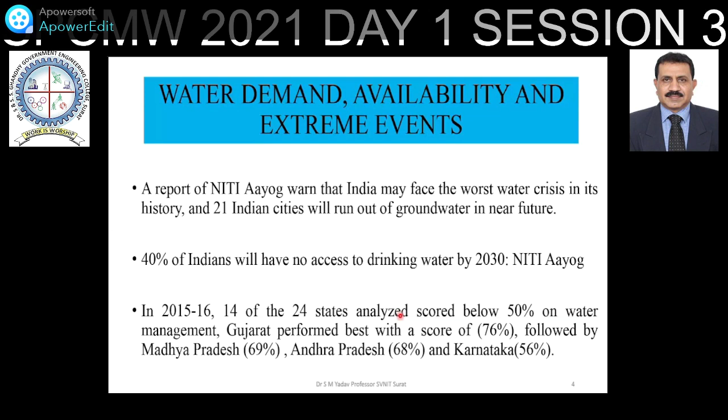Why has he mentioned clean water, cleanliness, and more steps towards cleanliness on 2nd October? This is one of the reasons, because as I said, 40% of Indians will have no access to drinking water. If we do not take proper measures, then many may be drinking contaminated water. In 2015-16, 14 of the 24 states analyzed scored below 50% on water management. Gujarat performed best with a score of 76%, followed by Madhya Pradesh, Andhra Pradesh, and Karnataka. So not only water conservation, but water management will be playing an important role in the management of water resources.

Water demand cannot exceed water availability. While water demand is increasing, water availability is decreasing. What is the scenario at the national level? At the national level, we observe that the water demand is increasing while the water availability is shrinking. What does it mean that water availability is shrinking? Here it is written water availability is shrinking.

Just after one or two slides, I will show you what is the picture of Indian available water. In 2010s, groundwater use globally amounted to 800 cubic kilometers per year. India, the United States, China, Iran, and Pakistan accounted for 67% of the global extractions. More than 30% of the world's largest groundwater systems are now in distress. This is the point of worry. You will observe that more than 30% of the world's large groundwater systems are in distress.

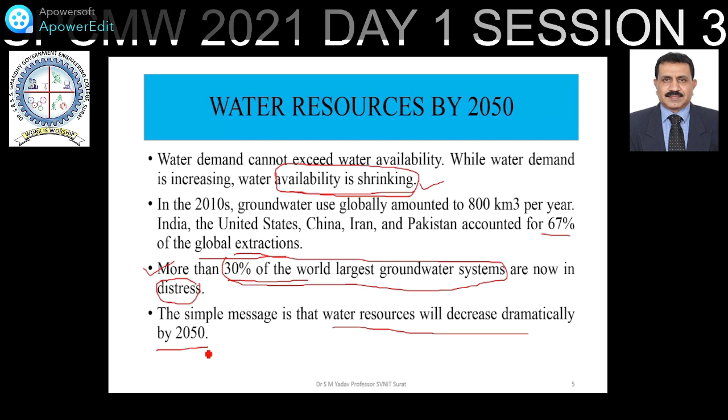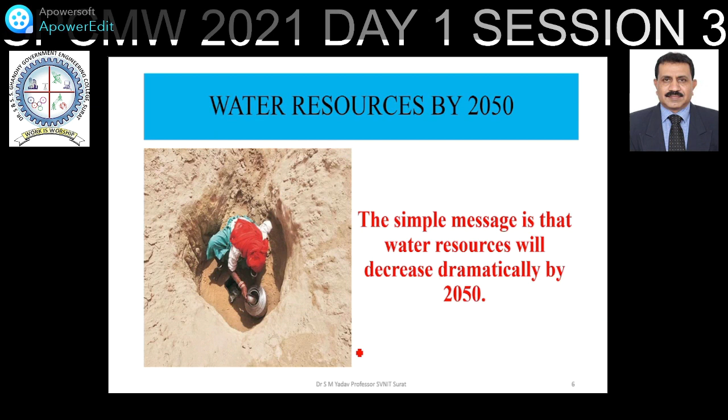On one side we talk about the amount of water; on the other side, the quality of water is also equally a point of worry. At present, 12% of the world population drinks water from unimproved and unsafe sources. More than 30% of global biodiversity has been lost because of degradation of freshwater ecosystems due to the pollution of water resources and aquatic systems. River regeneration, one of the major projects taken up by the Ministry of Jal Shakti, is also a step in this direction, because quantity and quality both are important.

And as far as the quality of water is concerned, according to the reports, many Indian river waters are no longer potable; the quality has gone from poor to poorer. However, I have seen in the last 5 years, if you see YouTube videos, you will come across a number of rivers and a number of NGOs that have come forward for the regeneration of rivers.

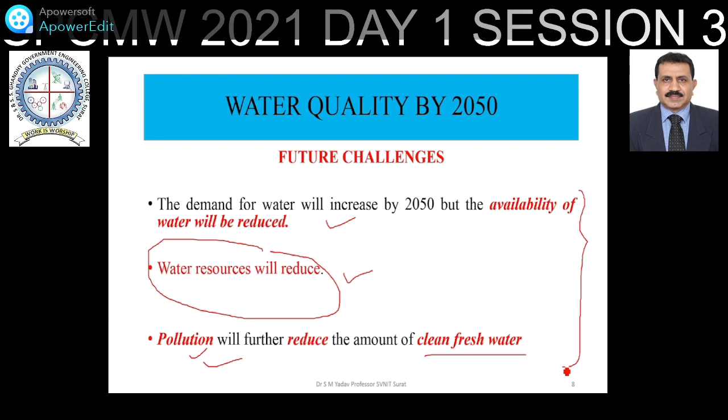So what are the future challenges? The demand for water will increase by 2050, but the availability of water will be reduced. Second, the water resources will reduce. And third, pollution will further reduce the amount of clean fresh water. So there are three big challenges: increase in demand, reduction in water resources, and increase in pollution. You need to take care of these three challenges in the coming decade. Even a decade is too long; I think within the next 3 to 5 years, you have to take it up.

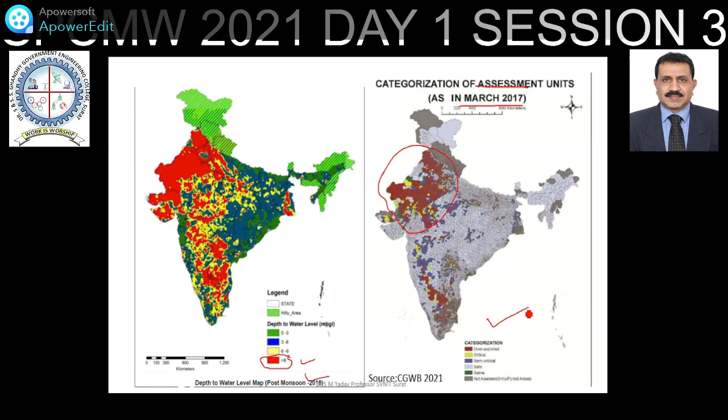So on one side, the water level has gone down more than 9 meters. On another side, you find that the over exploitation of water has resulted again in a decrease in the water resources. So what is the solution for this? When we are talking of the problem, we should also talk about the solution. And the solution is recharging.

When we talk of recharging, what do you mean by recharging? There is a word used, artificial recharging. Actually, in the word artificial recharging, there is nothing artificial, because artificial recharge is also governed by physical law. Hence, ultimately, it is recharging of the groundwater.

According to the American Society of Civil Engineers' definition, artificial recharge to groundwater is defined as the recharge that occurs when the natural pattern of recharge is deliberately modified to increase recharge. Whether we wish or not, whenever there is rainfall and surface runoff, the water recharges the ground.

But when we artificially modify the pattern of recharge to increase the recharge rate, we can call it artificial recharge. The process of recharge itself is not artificial, that's what I said. The same physical laws govern recharge, whether it occurs under natural conditions or artificial conditions. The recharging of ground takes place in either of the conditions naturally, right?

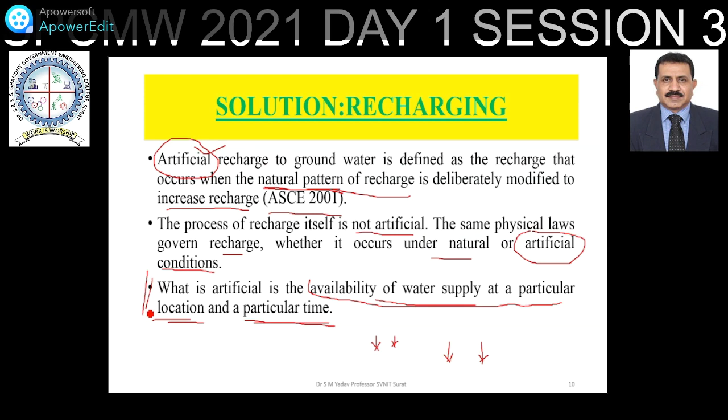When we talk of artificial recharge, in the broadest sense, one can define artificial recharge as any procedure which introduces water into a pervious stratum. Any procedure which introduces water into a pervious stratum.

Due to the efforts of this NGO, the drought prone areas of Maharashtra have been converted into greener belts. Hence, recharging or water conservation measures like this definitely help in conserving rainwater.

When we talk of artificial recharge techniques, they can be classified into direct surface techniques, direct subsurface techniques, combination of surface and subsurface techniques, and indirect techniques. So artificial recharging techniques can be classified into 4 categories: direct surface technique, direct subsurface technique, combination of surface and subsurface techniques, and indirect techniques.

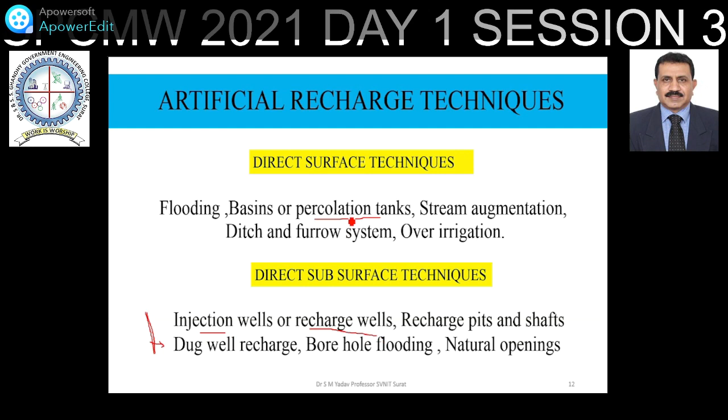Then the combination of surface and subsurface techniques. So we can have both. We can have a shaft as well as a bore well, right? Here we have seen the percolation tank which may have a recharge well, bore well or injection well. So if we combine percolation tanks with injection wells, that will be the combination of surface and subsurface techniques.

So we can have basins with pit shafts or percolation tanks with wells. This can be a technique through which we can recharge the groundwater by a combination of surface and subsurface techniques.

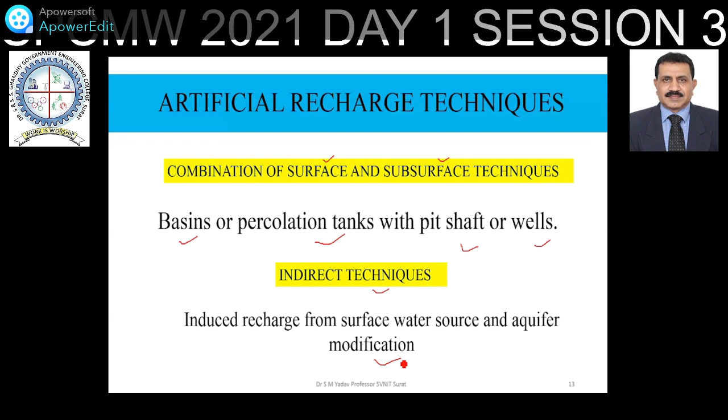While the induced recharge, that is indirect techniques from surface water source, and aquifer modification, these are the kind of indirect techniques. So artificial recharging, there are 4 techniques: surface, subsurface, combination and indirect techniques.

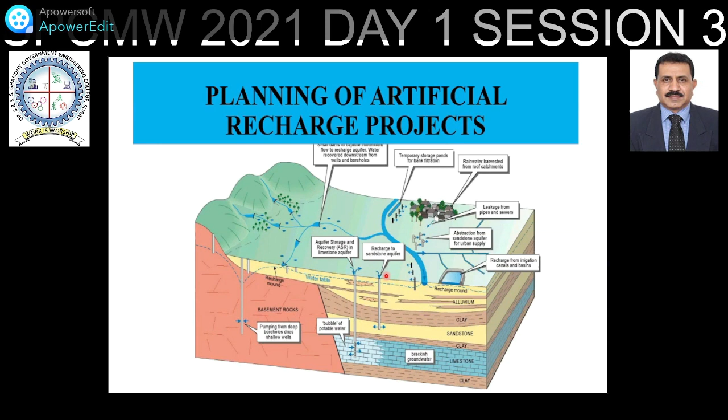Recharging by temporary storage ponds or bank, recharging from rainwater harvesting system, leakages from pipes and sewers, abstraction from sandstone aquifer for urban supply, recharging from irrigation canals. These are all possible ways and means by which groundwater recharging can be done. But as far as planning of artificial recharge is concerned, what are the points, or how will you identify the area where you want to go for recharging?

The artificial recharge of groundwater is normally taken up in the following areas. Areas where groundwater levels are declining on a regular basis. Areas where a substantial amount of aquifer has already been desaturated. Areas where availability of groundwater is inadequate in lean months, and areas where salinity ingression is taking place.

So which areas can you consider for artificial recharge of groundwater? These are the areas where groundwater levels are declining, where a substantial amount of aquifer has already been desaturated, where availability of groundwater is inadequate, not sufficient, and where you expect salinity ingress, where seawater intrusion is taking place. Seawater intrusion takes place when the freshwater head is much below that of the seawater head, and the seawater intrudes into the ground.

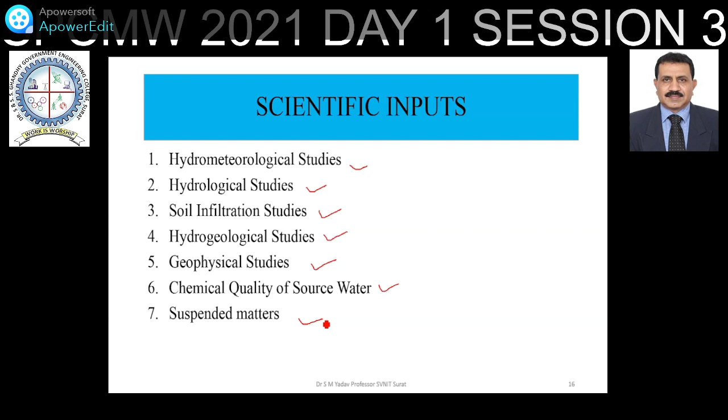One by one we will see what is the meaning of hydrometeorological studies. As the word itself suggests, it is related to meteorological parameters. So what are these parameters? Rainfall pattern, evaporation losses, and climatological features. You must know these features of the region where you want to undertake the artificial recharge project. This can bring out the extent of evaporation losses in the post-monsoon period, which would be helpful in designing storage of particular capacity with a view to have minimum evaporation losses.

Sometimes you may feel, sir, you are saying hydrometeorological studies and evaporation losses, and simultaneously you are asking for recharging of the groundwater. Is it possible that though the recharging project has been planned, it may fail because of excessive evaporation losses? Yes, the answer is yes. If it is done in such areas, it will be a wastage of money. Why? Because the region is such that the evaporation losses are very high.

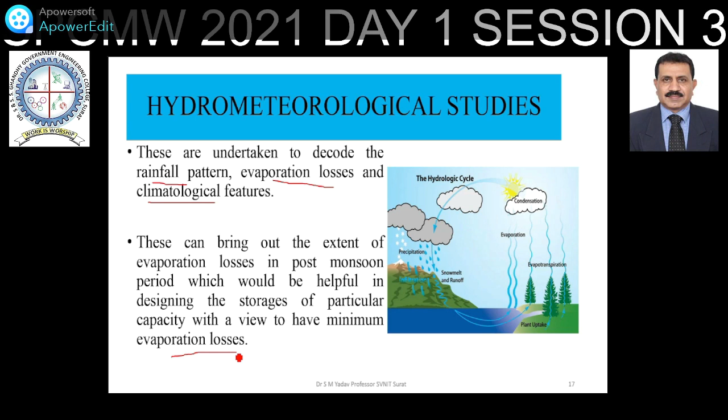When we are doing water conservation, our purpose is to store water for a longer period and utilize it when there is no rainfall. But due to excessive evaporation, the water cannot be stored in the water bodies and may get evaporated. So you have to take care of the evaporation losses and climatological features of the region where the project is planned. Hydrometeorological studies also relate to rainfall intensity, number of rainy days, etc., which decide the capacity and design of the artificial recharge structures.

Hydrological studies: the basic prerequisite for an artificial recharge project is to ascertain availability of source water, like in situ precipitation on the watershed, surface supplies from large reservoirs within the basin, surface supplies through trans-basin water transfers, and treated municipal and industrial wastewater. Treated, not untreated. So when you want to do recharging, from where will the water come? That is the meaning of hydrological studies. It comes from precipitation, canal supplies, trans-basin transfer of water, or reuse of water.

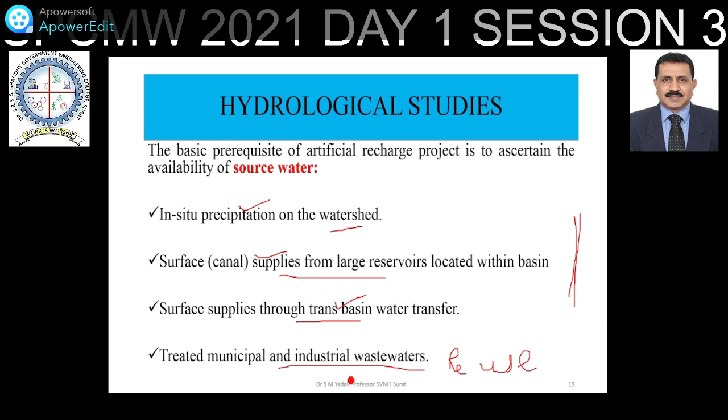Reuse of water, treated municipal water and industrial water. That reuse of water will also be available as water for the purpose of artificial recharging. The hydrological study also includes quantity that may be diverted for artificial recharge, time for which the source water will be available, quality of source water and the pre-treatment required, and conveyance system required to bring the water to the recharge sites.

But if you go in the month of March into certain hilly areas, there is no drinking water. This is absolutely pure, good quality water which is received in abundance by the Dang district in the monsoon season. But just after the monsoon season gets over in October, if you visit those areas in March, April and May, these regions thirst for fresh water. They don't have water to drink. So that's why it is written, the time for which the source water will be available. And you have to plan accordingly such that you can use that water during the lean period.

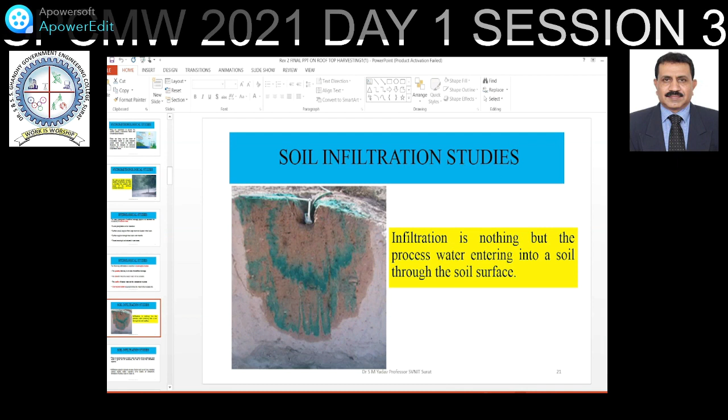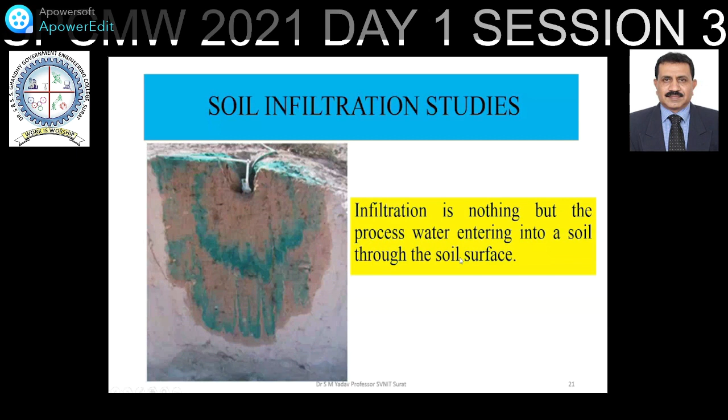What you can do is use geosynthetic material and have water ponds for conservation of water; that is possible. So it is very significant and important to study the soil infiltration of the area where you want to go for recharging. Infiltration is nothing but the process of water entering into a soil through the soil surfaces. There is a maximum rate at which water can enter soil at a particular point under a given set of conditions. This is called the infiltration capacity.

Infiltration capacity depends on many factors such as soil type, moisture content, organic matter, vegetative cover, season, air entrapment, formation of surface seals or crust, etc.

Sometimes when we learn in theory about soil infiltration and we have to plan the recharge methods, it looks like we are wasting our time thinking we already know this.

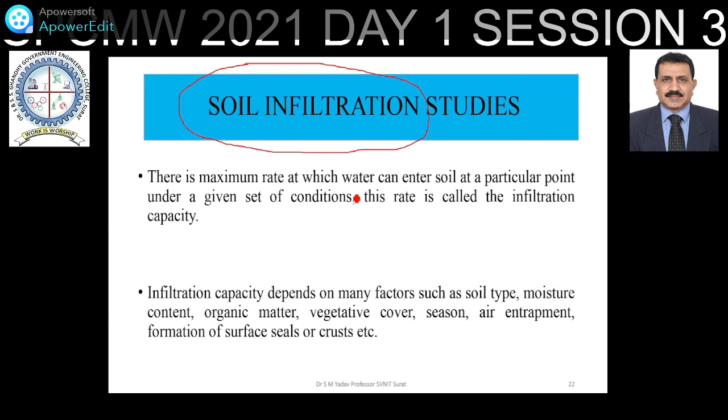But soil infiltration is very important, and depending upon the soil type, a specific recharging technique is required. Porosity determines the storage capacity and also affects resistance to flow, so infiltration tends to increase with porosity.

How do we measure infiltration? It can be measured using cylinder or flood infiltrometers. There are maps showing the infiltration rates of soils, and you can check the infiltration rates of a specific area to decide the suitable type of artificial recharge structure.

It is also significantly important to know about the hydrogeological studies of the region, which give you an idea about the geological strata, geological age, sequences, boundaries, contacts of individual formations, and structural expressions like strike, dip, folds, flexures, intrusive bodies, etc.

These are equally important when trying to find out a recharging method. The hydrogeological investigations, which provide the type of rock, groundwater potential, general pattern of groundwater flow, and chemical quality of water in different aquifers, are necessary to know before taking up the work.

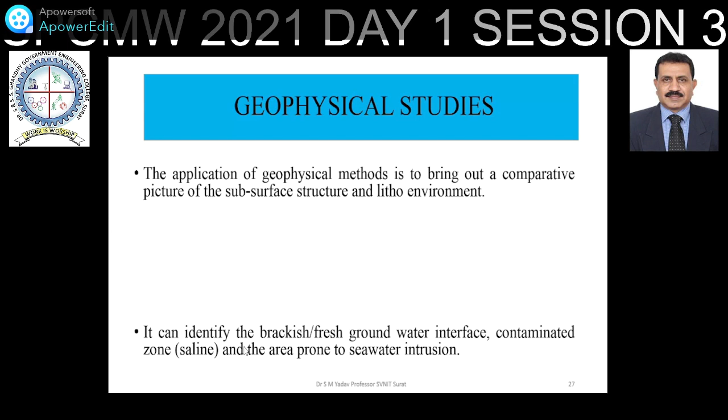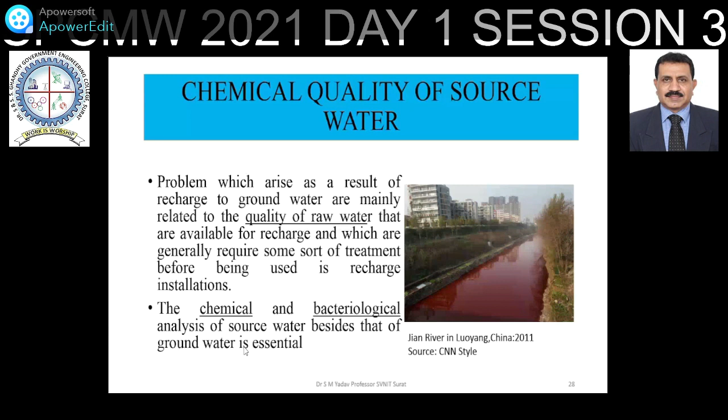The chemical quality of source water is also very important. One has to check that the raw water which we want to use for recharging purposes should be free from any sort of chemical or bacteriological contamination, as confirmed by analysis.

Suspended matter is very significant when we talk about artificial recharging. The suspended matter clogs the filters, and clogging of the filter results in reduction of the rate of recharge. So a major requirement for waters used in recharge projects is that they must be silt free.

Silt settles in stagnant water with a velocity that does not exceed 0.1 meter per hour. To obtain still clearer water, addition of flocculants and frequent agitation of the water must be done. Clogging by biological activity depends upon the mineralogical and organic composition of the water and basin floor, and upon the grain size and permeability of the floor.

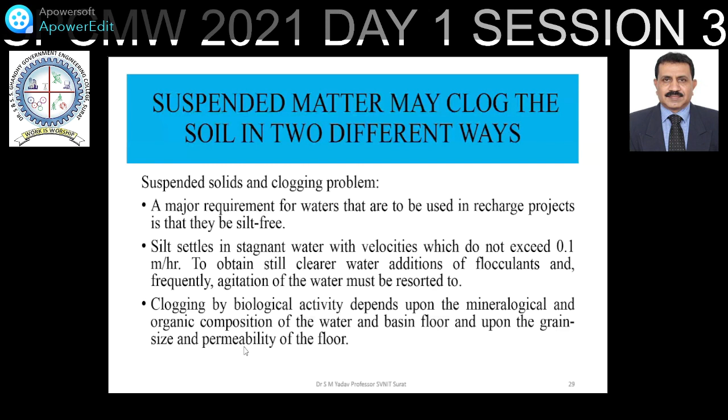So suspended matter should be avoided when we are planning artificial recharging.

Methods to minimize the clogging effects by suspended matter can be classified into two broad groups: periodically removing the mudcake and descaling or scraping of the surface layer, and installation of filters, addition of organic matters, and cultivation of certain plant covers. These are a few techniques by which you can avoid clogging of filters by suspended matters.

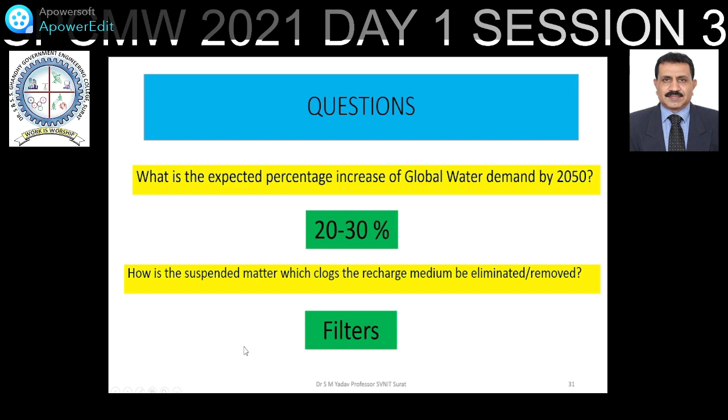The answer is you can use the filters. The filters can be used to remove the suspended matters from the water which we intend to divert for the purpose of recharge. After discussing about the planning of artificial recharging, let us now talk about rainwater harvesting.

So what is rainwater harvesting? Rainwater harvesting is the simple process used to conserve rainwater by collecting, storing, conveying and purifying for later use. It is one of the simplest and oldest methods of self-supply of water for households and residential household scale projects, usually financed by the user.

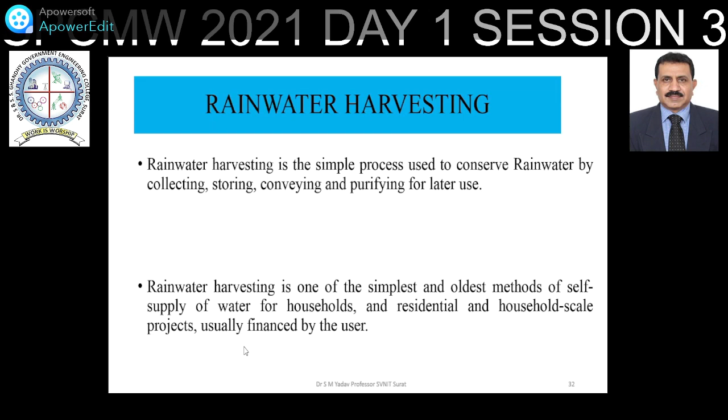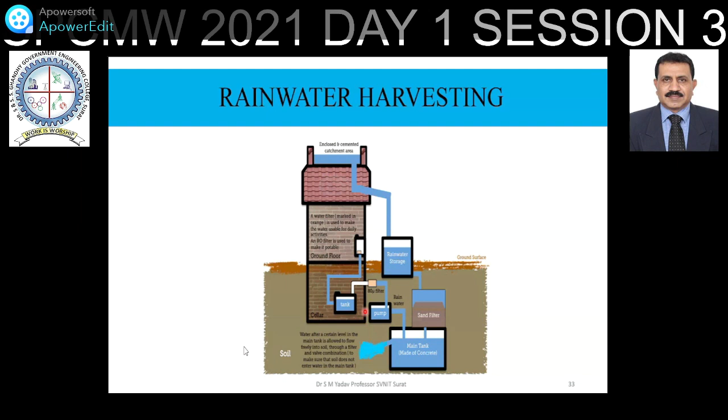This is another view of the rainwater harvesting system, showing all the components of a rooftop rainwater harvesting system. In this case, rainwater harvesting is possible in two ways: number one, overhead or above ground storage tanks, or number two, as shown here, into the ground. So it can be stored in above ground tanks, or it can be recharged into the groundwater.

So this is the definition sketch of rainfall rooftop water harvesting system.

I request all participants to pay proper attention for the next 15 to 20 minutes. If you pay attention for that time, I am very much sure that you can design any rooftop rainwater harvesting system for your lifetime. It is my guarantee. So as you look at this, you see the design components of a rooftop rainwater harvesting system: that is collection area, which is the roof.

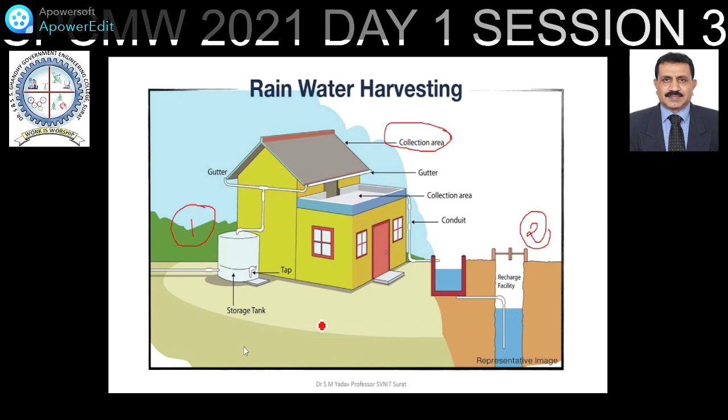So what are the advantages of a rainwater harvesting system? Here, by rainwater harvesting system, I mean rooftop rainwater harvesting system. It has less cost, helps in reducing the water bill, decreases the demand for water, reduces the need for imported water, promotes both water and energy conservation, improves the quality and quantity of groundwater, does not require a filtration system for landscape irrigation, and this technology is relatively simple, easy to install and operate.

This rooftop rainwater harvesting system is so simple, so easy to install and to operate.

I'll show you the video in which this will be proved that how simple the rooftop rainwater harvesting system is.

The disadvantages of rooftop rainwater harvesting system: it requires regular maintenance, requires some technical skills for installation, and limited or no rainfall can limit the supply of rainwater. If not installed correctly, it may attract mosquitoes and other waterborne diseases. You have to take care wherever you are installing the underground tank or overhead tank; they should be kept closed tightly.

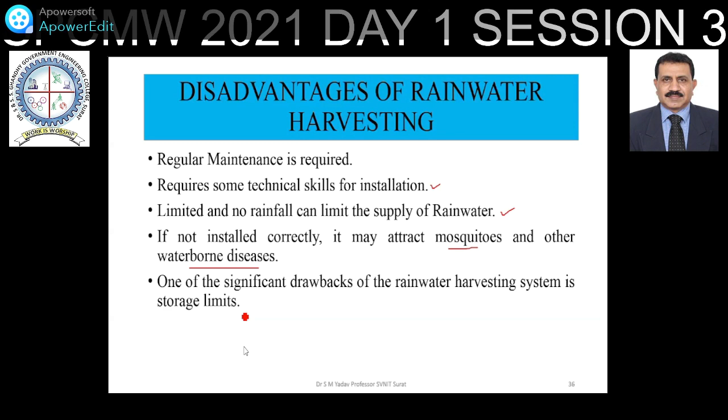As far as rainwater harvesting is concerned, I am going to talk about rooftop rainwater harvesting only in this particular lecture. However, there are a number of methods available for rainwater harvesting other than the rooftop, like campus buildings in your areas - they may be public buildings or commercial complexes. From there, if you can divert the water, you can use it. So that is rainwater harvesting from such buildings.

Storm water harvesting and defunct borewell recharge - this is another area from where rainwater harvesting can be done. Defunct quarry and mines water usage: states like Tamil Nadu and Gujarat have quarry areas from where limestone has been excavated and these quarries are abandoned. So these quarries may be used for the purpose of rainwater harvesting.

Restoration and rejuvenation of old water bodies: you may come across a number of defunct wells and ponds, and these can be rejuvenated and used for the purpose of rainwater harvesting. Then grey water recycling, reduce and reuse - the water used by industry can be treated, and after treating, the recycled water can be used along with rainwater for the purpose of irrigation and other uses.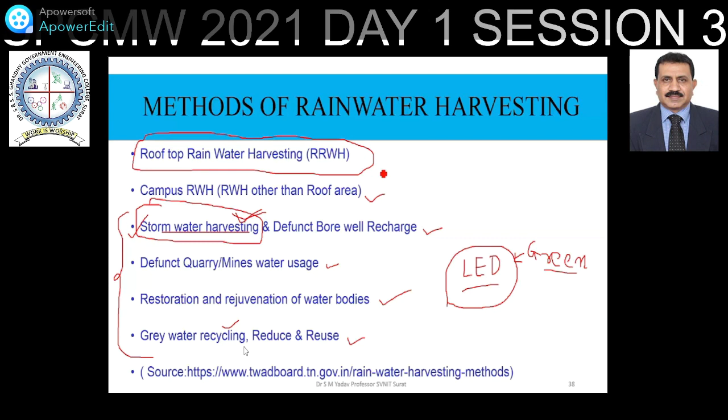So methods of rainwater harvesting will concentrate more on rooftop rainwater harvesting. In case of rooftop rainwater harvesting, as I said, you can design a rainwater harvesting system for a lifetime if you pay attention for the next 15 minutes.

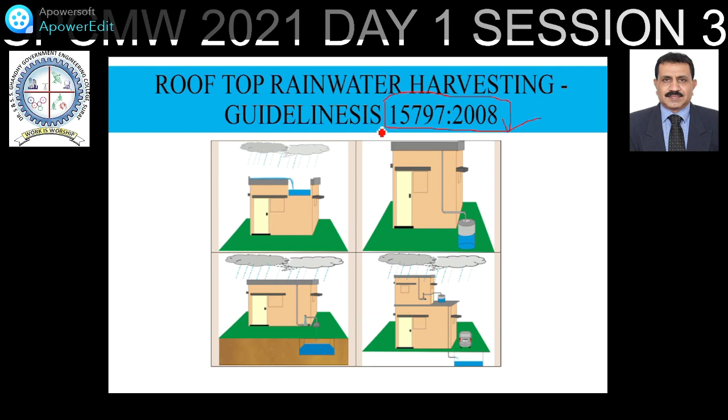Out of that, the first thing you can see from this slide is IS 15797:2008. This is the IS code used for the design of rooftop rainwater harvesting systems. You can download it just now - it is freely available on the net, and you can download this IS code 15797:2008, which guides you on how to design the rooftop rainwater harvesting system.

So we will see one by one the factors affecting the rooftop water harvesting system. First is rainfall quantity - how to find out the amount of rainfall or volume of water available in your area.

So total volume of rainwater available from any rooftop surface is the product of total rainfall and the surface area of the collection. Suppose you are staying in the city of Surat. The average annual rainfall of Surat is 1100 mm, and my house area is 100 square meters. So 100 square meters into my annual average rainfall, the product of that may give me the volume of rainwater that is available. I have to consider the runoff coefficient on account of losses like infiltration, evaporation, etc.

If you have downloaded the IS code 15797 2008, then in that two tables are given, table number 1 and table number 2. Table number 1 is for flat roofs and table number 2 is for sloping roofs. So if you have the area of your rooftop and the average annual rainfall of your area, you can compute the volume of rainwater available for harvesting.

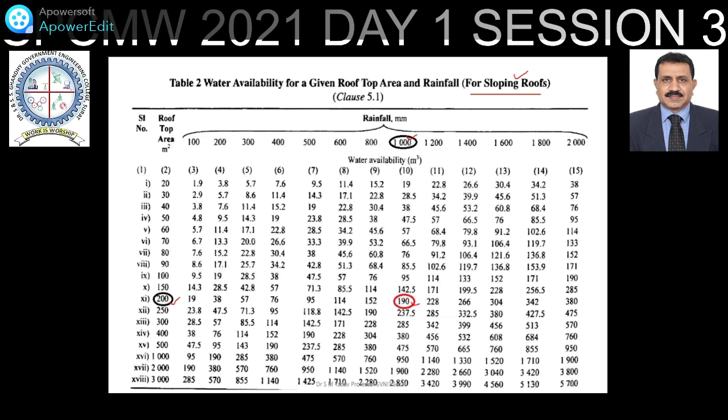Now I am explaining the steps of designing a rooftop rainwater harvesting system. First, you have to refer IS 15797 2008. Second, to find the volume of rainwater available, refer table 1 if it is a flat roof, and table 2 if it is a sloping roof. If you get the rainfall in 1 to 2 months of the entire season, you need large storage. And if you have rainfall throughout the 4 months, you may need smaller storage, right?

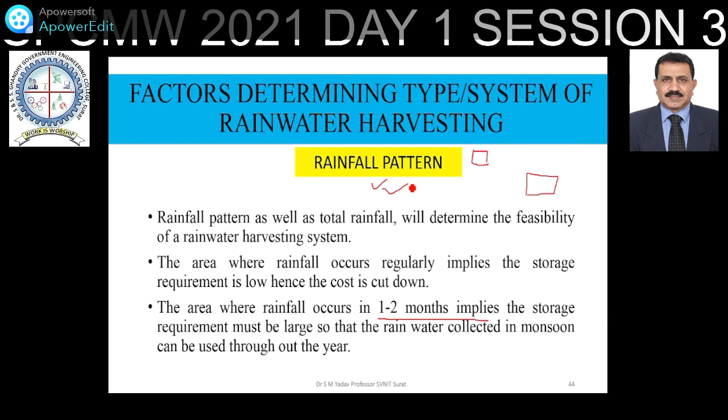So the rainfall pattern will determine whether you have to go for the design of a big tank or a small tank, considering the rainfall pattern of that specific area. Suppose you are in Rajasthan, where the rainfall occurs only in 2 months for the entire season; naturally you should have a bigger tank so that you can conserve more water which falls during those 2 months, to be used for the rest of the lean period. So that is the rainfall pattern.

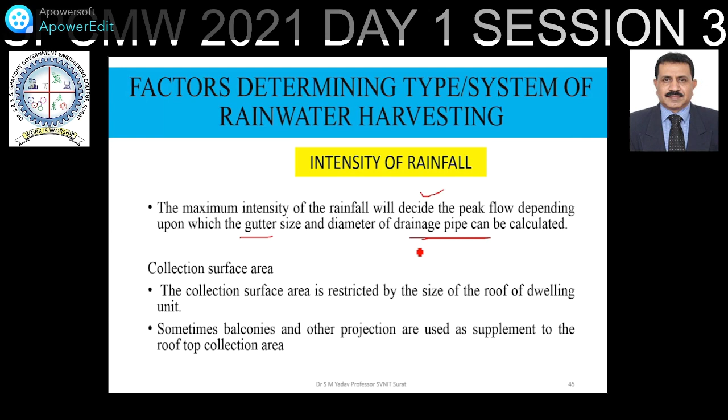Then intensity of rainfall: whether the rain has been falling in a shorter duration as heavy rainfall, or its intensity is less. Depending upon that, the size of the gutter and the diameter of the drainage pipe can be calculated. The minimum diameter and minimum width of the gutter you can know from the intensity of the rainfall. The collection surface area is restricted by the size of the roof of the dwelling unit, right?

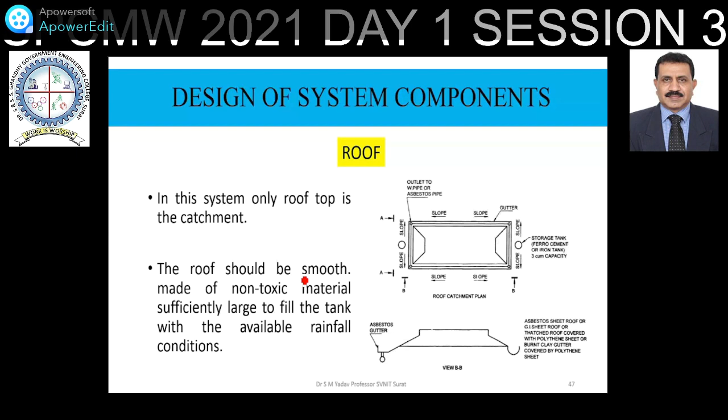That is the top of the roof from which you want to collect the rainwater; that decides the size. The rooftop, as we have already discussed, will have a sloping roof or a flat roof. You should have one outlet in one particular direction, then it will be easier to take the water to one specific point, right? And from that you can carry it further.

Guttering and first flush device. This is very important. The water which is collected or which has fallen on the rooftop can be collected through the gutter, and through the gutter it will go into the underground tank, overhead tank, or the tank which is placed above the ground. But you should have a first flush device. What is meant by a first flush device?

When there is the first rain of a season, dirt, pollutants, dust, leaves, all these will start flowing with the first water. And this water you do not want to get added into your storage tank. Therefore, there is a first flush device which diverts the water away from the storage tanks.

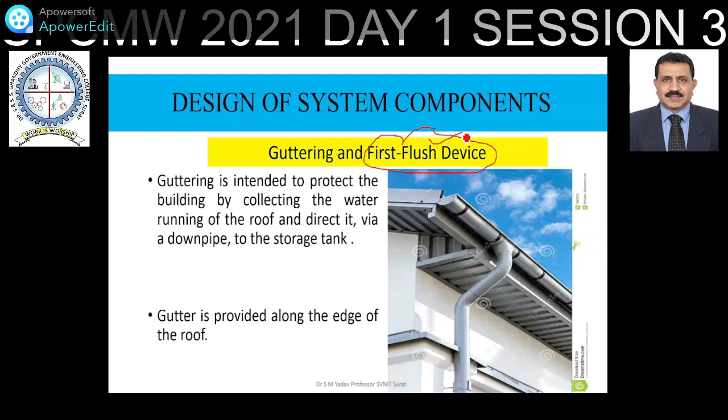And once the terrace is cleaned and there is no more dirt, leaves, etc., then that water is allowed to enter into the storage tanks. So guttering and first flush devices are used. Then come the filters. Even after the first flushing, there may be suspended particles which are carried by the rainwater, and this may clog the filters.

So there are two types of filters available. One is online filters and the second one is purpose-built filters. The online filter is used when availability of runoff as well as the rate of recharge is less. It is manufactured from reinforced engineering plastic material, available in various sizes and flow rates from 3 to 25 cubic meters per hour.

These are the filters which are to be fitted. If this is the pipe which carries the rainwater, these filters are fitted into these pipelines, and they remove the dirt and all that from the water, right? They are very cheap, not very costly. These kinds of filters are called online filters.

And purpose-built filters, wherein you have sand of 1.5 to 2 mm on the top, 5 to 10 mm size gravel next to it, and 5 to 20 centimeter at the bottom, right? If you prepare this type of gradation of sand bed, whose thickness is around 0.5 meter, and the water percolates through it, they are called purpose-built filters. So these two filters are used for keeping the suspended particles or dirt matter outside of the tank.

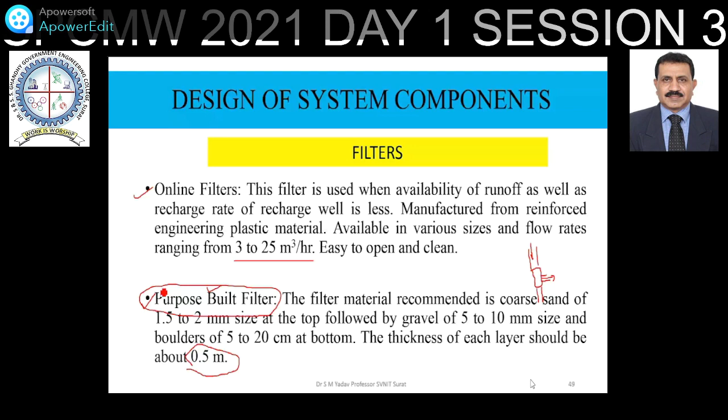Right. So such ready-made filters are also available in the market. If you can use this, then that is good. These filters are also used to keep the dirt and all that away. I wanted to show you the working of the filter.

Let me see. But I have to share that video.

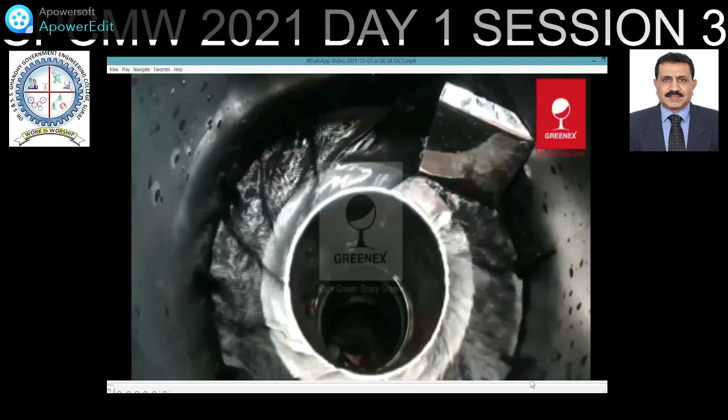One minute, I have to share the video file on screen. So I will share it again. Stop. Share. WhatsApp video. Yes. Hello. Are you able to see the video screen? Someone of you unmute yourself and tell me. Yes, sir. Yes, sir.

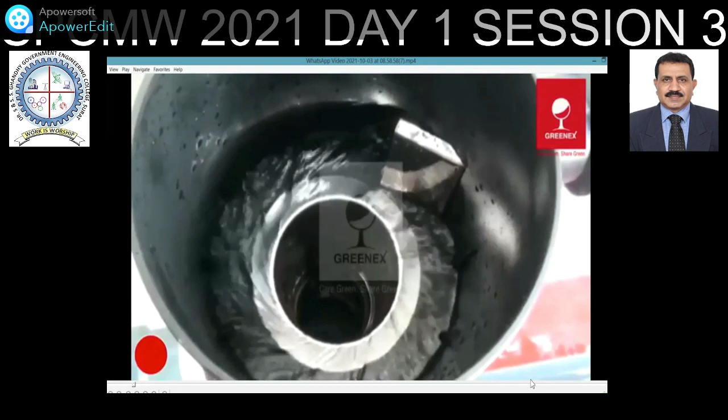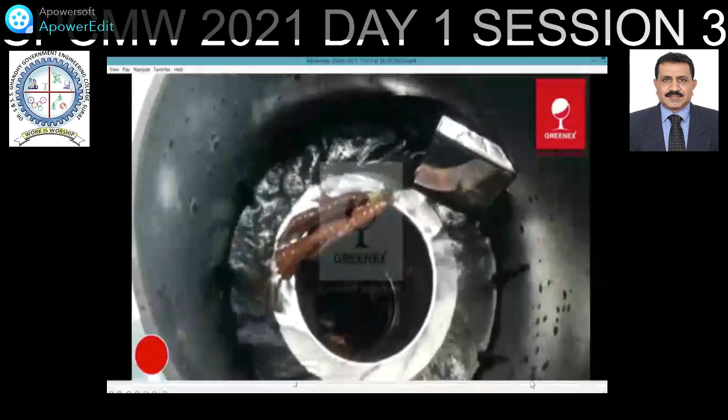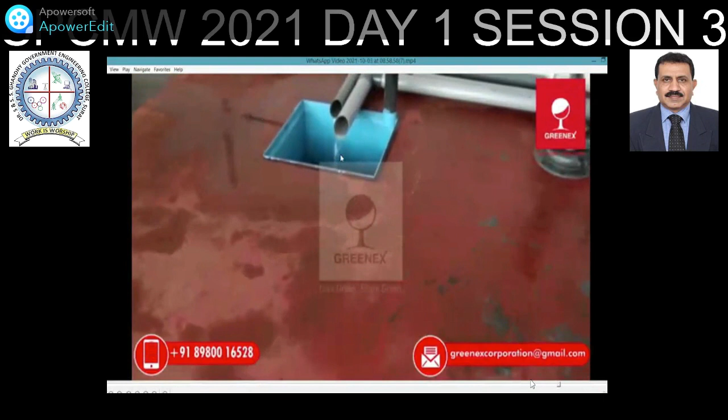So you can see here. So this is the function of the filter, right? So how actually the suspended material is taken out from the rainwater, that I have shown you.

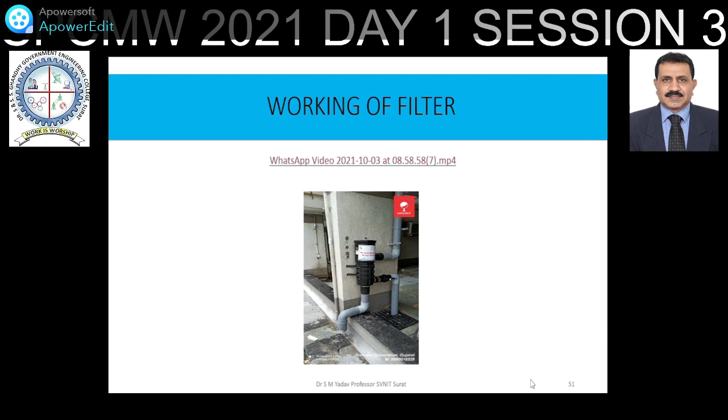Now computation of the storage volume. Storage volume as per IS 15797/2008 can be computed using V = T × N × Q, where T is the length of dry season, N is number of people using the tank, and Q is consumption of water in liters per day per capita, right? So using this, you can work out the volume of tank in liters. So that is storage volume.

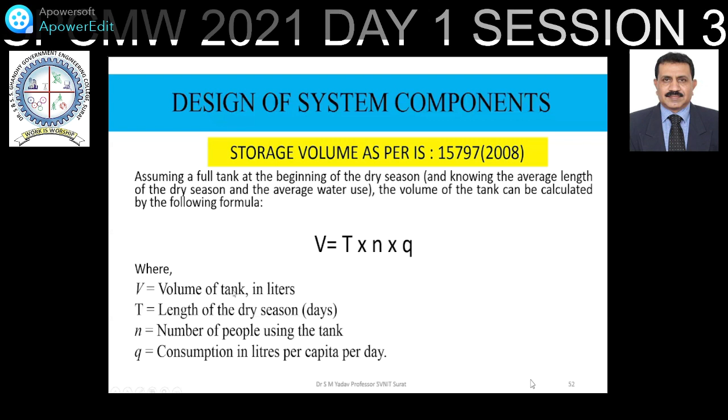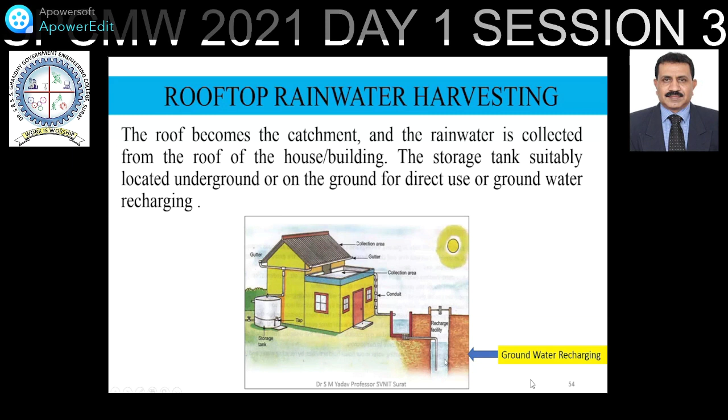The storage tank can be above the ground. As you can see here, the tank is either of RCC, plastic, HDPE or ferrocement. Again, from rooftop, you can also divert the water into the groundwater. After filtration, you can add it directly into the dug well. That is also shown over here.

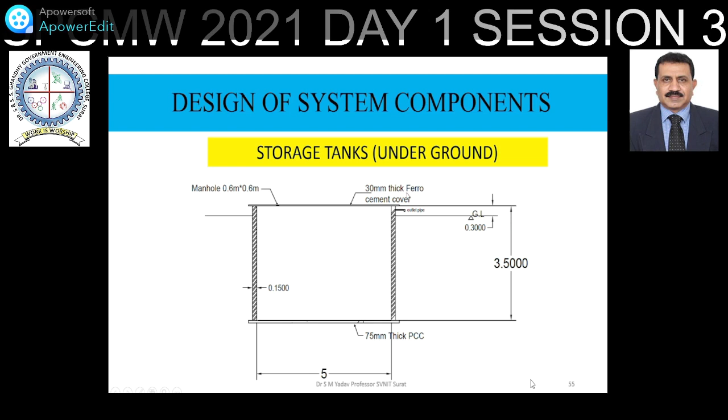This is also a storage tank, which I have shown you how it can be designed, where 5 meter is width, 3.5 meter its depth, having a cover at the top and outlet pipe. It is kept 30 centimeter above the ground, an underground storage tank, which is designed for the conservation of roof rainwater.

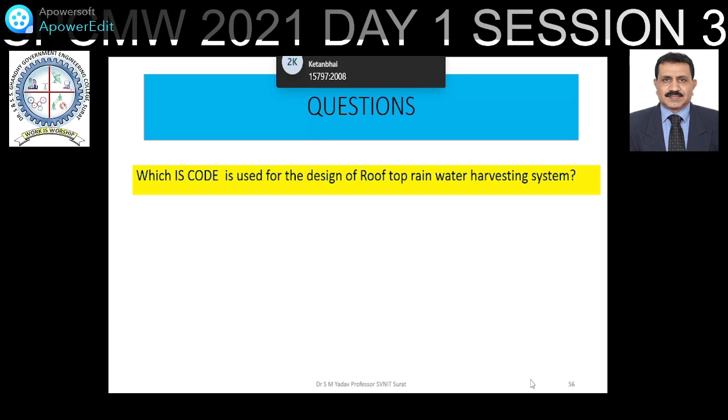Since you studied the design of rainwater harvesting system, let me ask you two questions. The first question is, which IS code is used for the design of rooftop rainwater harvesting system? I hope all of you reply correctly. Please type the IS code in the chat. I hope many of you have replied, and the correct answer is IS 15797 2008.

My next question is, what care is required at the time of first rain of the season, if you want to carry out rainwater harvesting? You can type your answer in chat, and I think it is recording, so your answers also get recorded. So please reply in chat. What care is required at the time of first rain of the season?

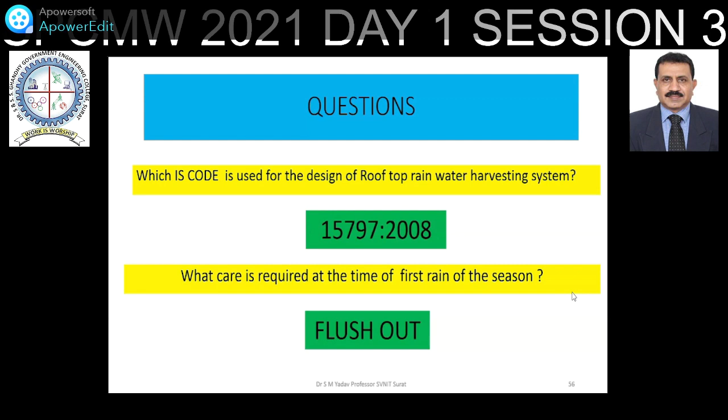The specific thing I talked about, and that is flush out, right? You should not let that water go directly into the storage tank, but you have to design a flush out device which takes that water out of the tank, right?

Before the design of rainwater harvesting system, which I did right now, I would like to show you one simple rainwater harvesting system, which is very cost effective and easy also. Let's see. This is this particular video, right? I hope you can see the video.

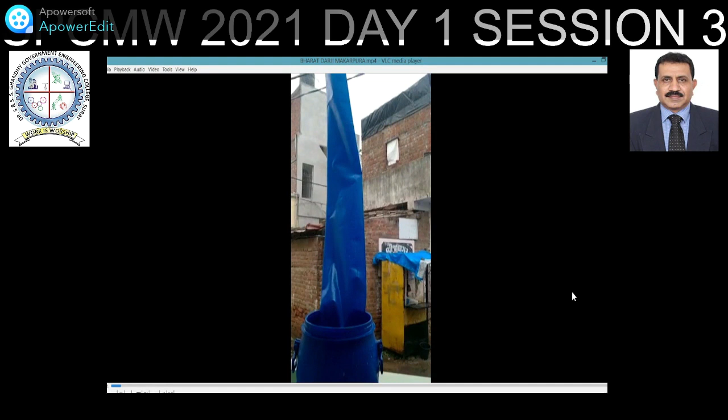Hello. Hello. Yes, sir. Yes, sir. Okay. Okay.

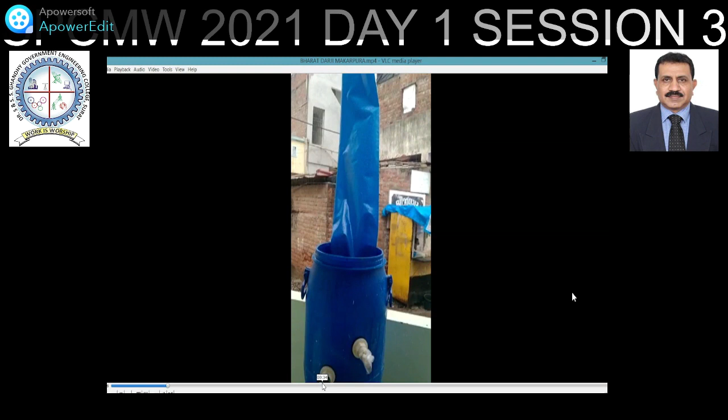As I said, this drum is nothing but a filter, right? The filter with 3 layers I showed you, sand, gravel and pebbles, has been filled in this tank, and you can see this is the outlet. Through this outlet he has used a simple pipe to take the water into his bore. You can see the water is directly supplied into the bore. So when anyone really wants to do water recharging, cost is not a problem.

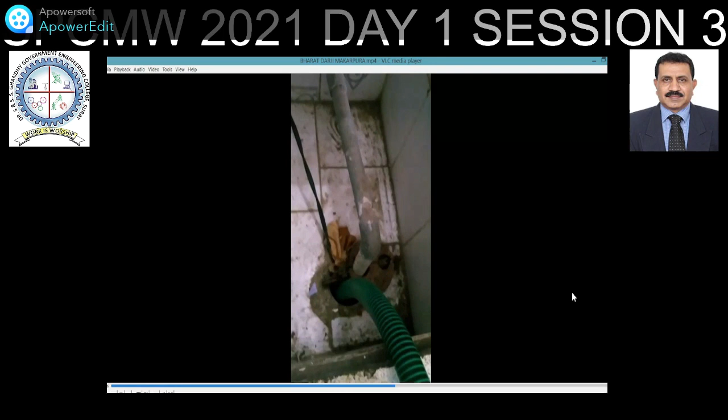Cost is not a matter. He can do it using this simple system, which costs less than 1,500 rupees, right? This arrangement, anyone, all 47 participants who are attending this particular class, can do right now in their house as far as rainfall rooftop recharging of water is concerned, right?

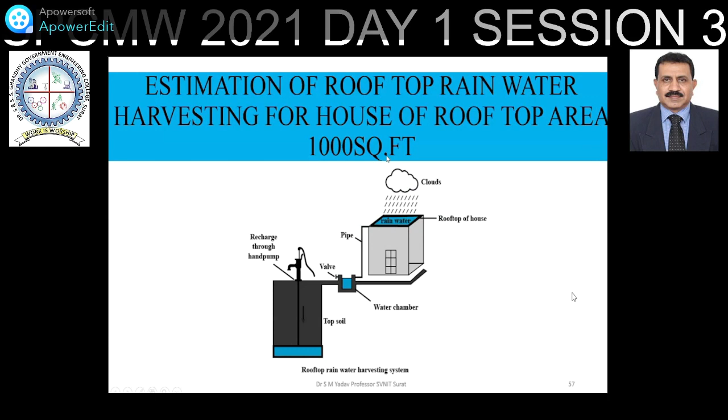So I have designed one system of rooftop rainwater harvesting for a rooftop area of 1,000 square feet, wherein I have considered water availability 100 square meter, 850, and referring IS 15797 table number A1, 68 cubic meters, that is 68,000 liters of water is available. The gutter size which I can use, D is equal to 100 mm and W is equal to 176 mm. This is the minimum size of the pipe available which you can use as a gutter, the drain pipe and the width of the gutter.

The volume of tank that I have computed is for 4 persons, utilizing 135 liters per capita per day for the dry period, that is 4 months, 120 days. So I need approximately storage of 64,800 liters of water. If I use the coefficient for the losses as 0.87, that is 56,376 liters of water that may be required for storage, while the available water as computed is how much? It is 68,000 liters, right?

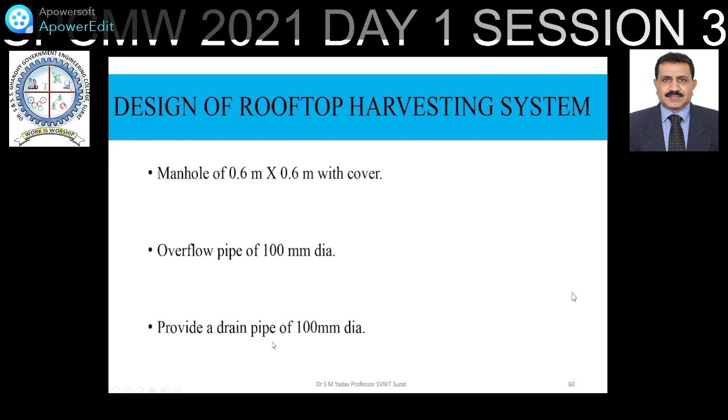Hence the tank which I will design for this particular house will be of 56,376 liters. Why? Because the available amount of water is 68,000 liters. So this you can also calculate for your rooftop. Type of tank, RCC tank, you have to provide a 0.6 by 0.6 meter manhole cover, overflow pipe of 100 mm diameter. It is an underground tank, and provided a drain pipe of 100 mm diameter.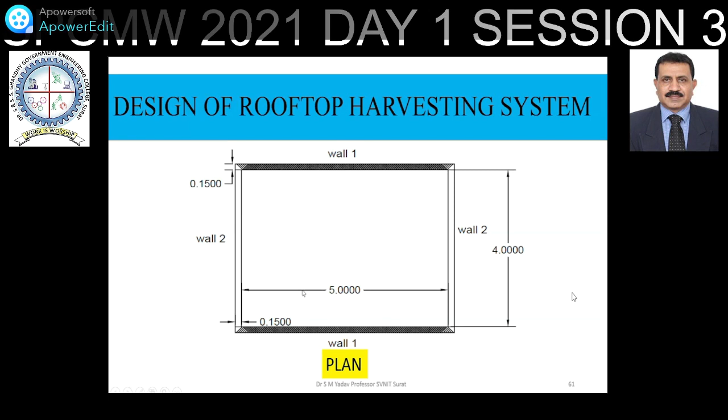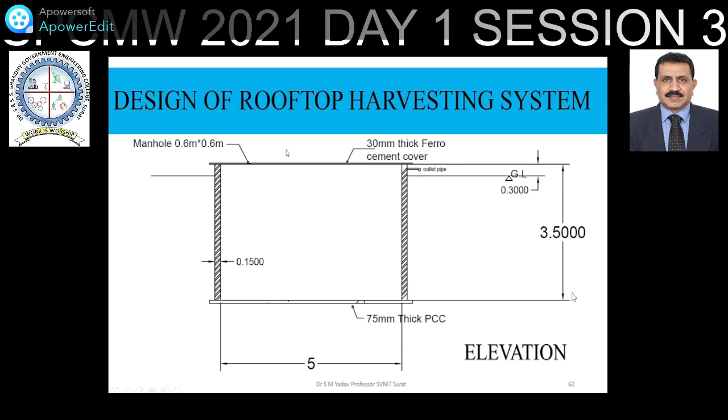So this is the plan of the tank which I have designed for 68,000 liters of water, 5 meters in length and 4 meters in width. And this is the sectional elevation. I have kept it 0.3 meter above the ground with an outlet pipe. When it gets filled, through the outlet it can go outside the tank, on the top of which you have to keep a manhole of 0.6 meter by 0.6 meter size.

The estimate also I have prepared, and the cost I have worked out, and you will be surprised to know that the cost of the tank is very less. You will see here 1.38 rupees per liter. If you construct this, the cost is around 93,860 rupees. That is the cost of the underground tank. For such a huge tank, it may cost 1.38 rupees per liter. And if I consider the life of the tank as 50 years, then it comes very negligible, 0.027 rupees per liter.

But this cost of construction of tanks, people feel that it is huge or considerable. Then, as you have seen Bharat Bhai explaining, that system also you can have, and you can directly recharge your well, that is bore well. There the cost is hardly 1,000 rupees or 1,500 rupees or 2,000 rupees, right? So if you have a working bore or an abandoned bore, in both bores you can directly recharge the water into the ground. Okay, rooftop rainwater harvesting systems.

I have visited a few campuses, a few locations before delivering this lecture, and wanted to see actually how they are working. In SVNIT campus, we have 22 recharge wells, located at various locations. You can see in the first picture the rainwater line coming down from the roof of the ground plus 4-storied hostel, which is carried into the recharge well.

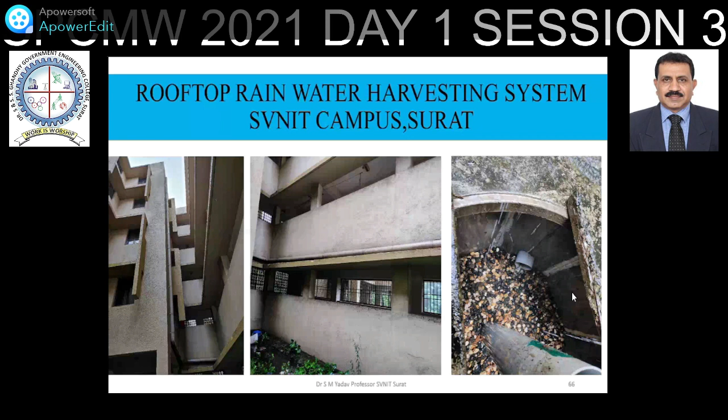You can see on the extreme right side of the picture the pebbles and the water. Just see the quality of water. If you see the picture clearly, it is crystal clear water. This is an actual picture of 29th September 2021, where the recharge wells of SVNIT campus were in working condition. This is another picture of SVNIT recharge wells. You can see the pebbles and the water entering into it, and the central one is the well through which the water is supplied into the bore well, right?

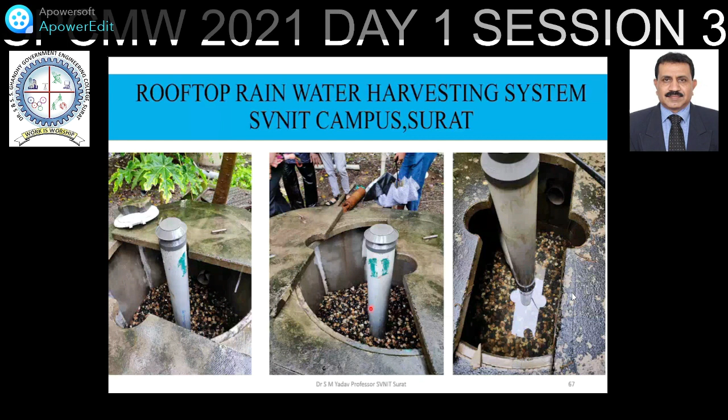Right side picture again, you see that it carries some water. The filter medium is there, and slowly it will filtrate the water. It will go to the bottom tank, and from the bottom tank it will go into this particular recharge well, which is in the center. The central pipe is the recharge well, and through this recharge well, whatever water is filtrated, that filtrate water enters into these recharge wells, which are in the center, right?

Advantages of rooftop rainwater harvesting in urban areas. Due to increased urban activities, the natural recharge has been reduced, and due to scarcity of land for implementation of any other groundwater recharge system, one can go for rooftop rainwater harvesting. Rainwater runoff that otherwise flows through sewers and gets wasted can be harvested and utilized. Recharging aquifers will improve the groundwater quality.

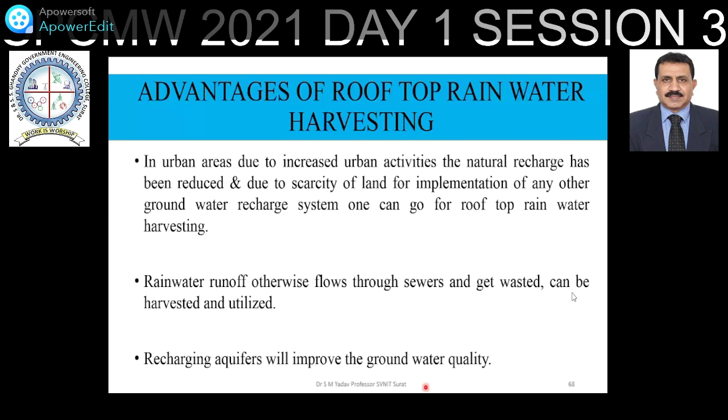Harnessed water can be used in the time of scarcity. The harvesting structures are simple to construct, economical and eco-friendly. In coastal areas, over-extraction of groundwater leads to saline water ingress. Storage water bodies or rainwater harvesting structures like this will help in preventing the salinity ingress. Storing harvested water underground wherever feasible is advantageous, as such storage is not exposed to evaporation and pollution, so good quality water is available.

What are the design features one should keep in mind when dealing with the rooftop rainwater harvesting system? Number one, the substances that go into the making of the roof should be non-toxic and chemically inert. One should check that there is no paint or any such material on the top of the roof, which will flow with the rainwater and get accumulated in the water tank. That care is required to be taken.

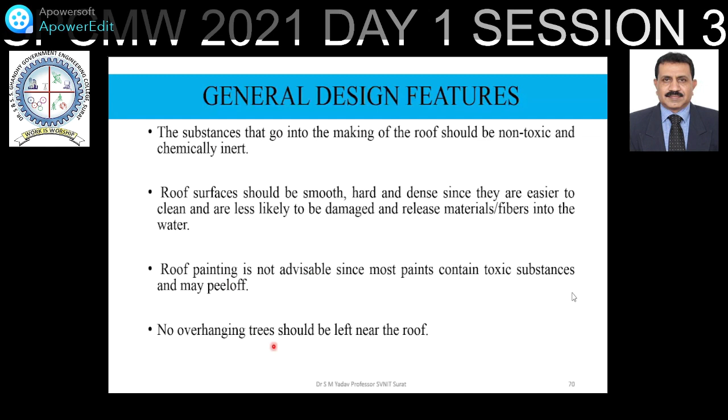Roof surfaces should be smooth, hard and dense, since they are easier to clean and are less likely to be damaged and release materials and fibers into the water. Roof painting is not advisable. No overhanging trees should be left near the rooftop storage. No bird nesting is allowed near the roof tank. All gutter ends should be fitted with a wire mesh screen to keep out the leaves, to prevent clogging material. The lesser the clogging material, the better will be the recharging.

One of my observations is that there are recharge systems you may come across in and around you, but these recharge systems may not be working properly because of clogging, and hence one needs to take care of such measures, providing the finer meshes which prevent the clogging of the recharge wells. Appropriate arrangement for discarding the first flow of rainfall. That is the question which I have asked you. First flush out. That is very important.

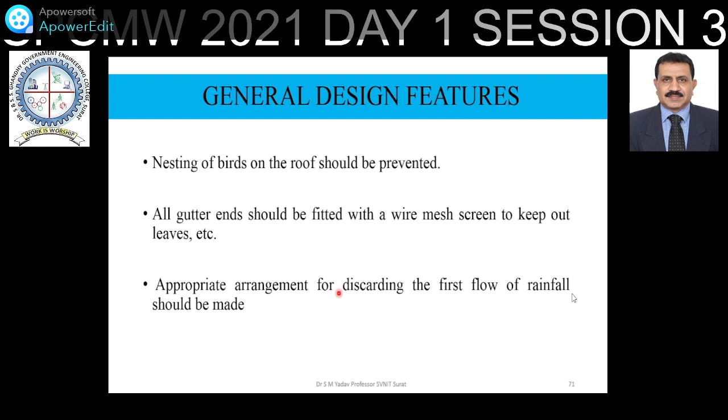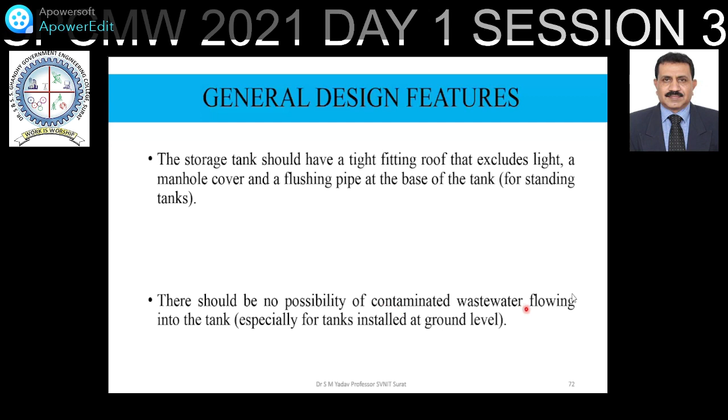The storage tank should have a tight-fitting roof that excludes light, and a manhole cover and flushing pipe at the base of the tank. Light should not enter, otherwise there will be biological activity and that may contaminate the water. The tank should be placed such that no contaminated wastewater flows into the tank. These are the general features one is required to take care of when designing the rainwater harvesting system.

As far as the management and maintenance of the rainwater harvesting system is concerned, first and foremost, as I have already explained, you have to flush out the first water. Second, you have to take care of sediments entering into the tank so that the filters do not get clogged.

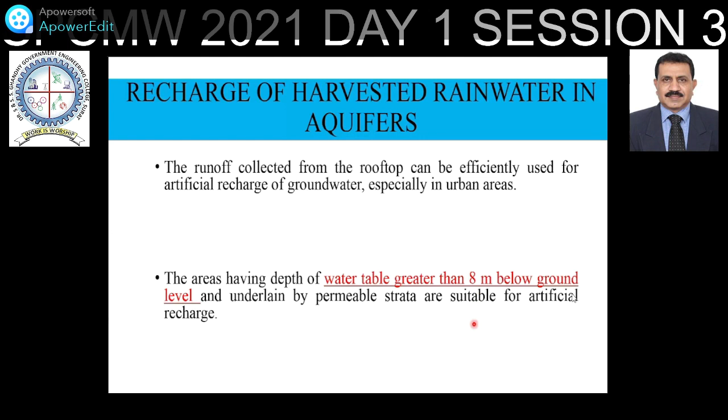And most importantly, the areas having depth of water table greater than 8 meters below ground level and underlain by permeable strata are suitable for artificial recharging. If your depth of water table is above 8 meters, meaning 4 meters, 5 meters, 6 meters, then please take care which type of recharge well system you will utilize. If it is below, then it is fine. Secondly, it should have permeable strata, so that the recharge water can enter into the underground strata. Otherwise, it will not enter.

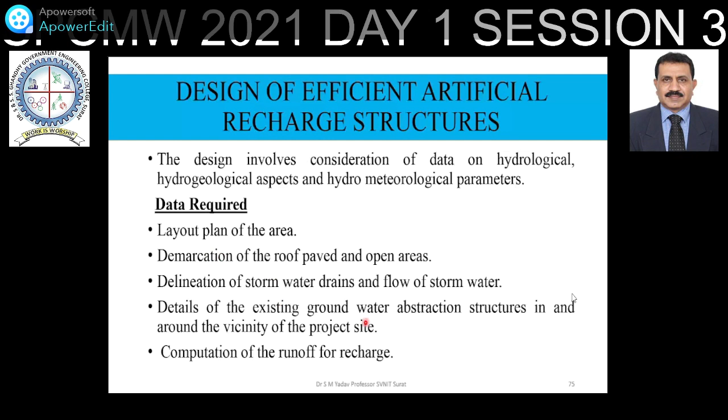Design of efficient artificial recharge structures. The data required: plan, demarcation of paved area, delineation of stormwater drain, details of the existing groundwater abstraction, and computation of runoff, or the quantity of water which is available for the recharge. After discussing the rainwater which